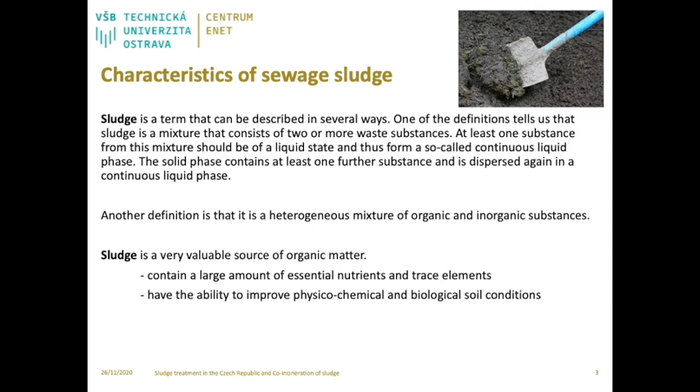Raw sludge has a water content of approximately 93% to 99%. Therefore, dewatering or drying can be necessary for further utilization. The second main component is dry substance, which is made up of organic and inorganic substances.

Organic substances can be divided into two groups: non-toxic and toxic substances. Non-toxics are represented by up to 60%, and include mainly sugars, fats, proteins, waxes, and also nitrogen and phosphorus compounds. Sludge also contains potassium, but to a lesser extent than nitrogen and phosphorus.

Toxic substances include hydrocarbons, pesticides, polyphenols, and heavy metals. Not only organic substances are here, but also inorganic substances, which include quartz, feldspar, carbonates, or iron oxides.

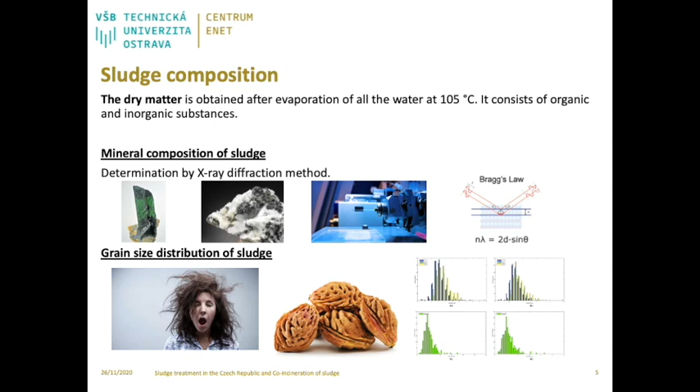As was mentioned before, sludge can contain also heavy metals. Increased concentration of toxic substances is mainly caused by elements for which the set limit values are monitored and evaluated. These values must be observed in cases where the sludge will continue to be used for applications on agricultural land. In situations such as this, it is therefore necessary to make a thorough analysis of the soil and set limits on toxic elements which are dealt with in the decree of the Ministry of Environment.

Monitoring and analysis are carried out mainly at those treatment plants for which the intention is to use the resulting sludge on agricultural land. The number of currently monitored wastewater treatment plants is around 100 facilities. Toxicity is monitored for elements such as arsenic, cadmium, lead, copper, and mercury, and also others.

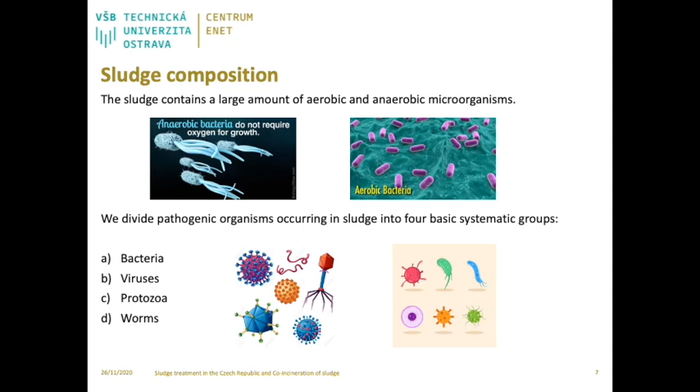Especially for certain species of parasites, we divide pathogenic organisms occurring in sludge into four basic systematic groups. The first are bacteria, then viruses, then protozoa, and worms.

Selection sludge examination details the main analytical protocols for the following properties: dry matter content at 105 degrees Celsius, then suspended solids at 105 degrees Celsius, then fire losses, there are more options, 105 to 180 degrees, then 105 to 250 degrees, then 105 to 550 degrees, and the final 550 to 900 degrees.

Other properties are weighted elementary composition, especially for organic sludge, then temperature, pH, oxidation reduction potential, conductivity, alkalinity, fats, fiber content, pathogenic agents, salinity, chlorides, amounts of water bound with suspended solids, and quality of sludge interstitial water.

Sludge structure can be identified by the following factors. Apparent viscosity in relation to rheological behavior. Slimy suspensions are non-Newtonian liquids. The figure found will depend on the type of rheometer used and on the strain shear energy applied. Therefore, when stating a sludge viscosity, the type of rheometer used and strain applied must also be specified.

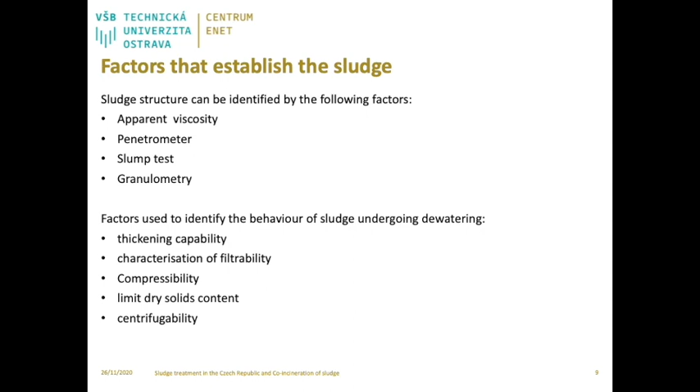We recognize 5 types of formation and division of sludge.

Another one is secondary sludge. It separates in the settling tank, where the biological stage of purification takes place. The structure of the sludge is flaky, which negatively affects its dehydration, which is more difficult than in the primary sludge. The color of the sludge ranges from light gray to dark brown. Composition also depends not only on the nature of the wastewater, as with primary sludge, but also on the technologies used during treatment. Impurities that haven't been completely removed during the treatment of the primary sludge, like gravel fibers, may still be present in the secondary sludge. It's more often called active sludge.

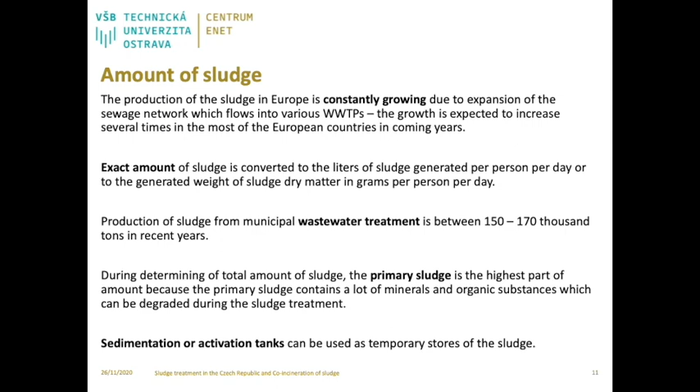For evaluating sludge treatment systems, it's necessary to estimate the amount of generating sludge. Part of the primary sludge can be easily determined by successful elimination of solids. The highest efficiency system is if the elimination of solids is around 50 to 70%.

Sludge treatment systems can be divided into three groups based on concentration of sludge: problematic system, sludge with concentration of 3%; average system, sludge with concentration of 4.5%; and optimal system, sludge with the highest concentration, about 6%.

The estimate of the amount of chemical sludge depends on stoichiometry and amount of chemicals. The amount of biological sludge is more difficult to estimate; a number of methods and procedures must be followed.

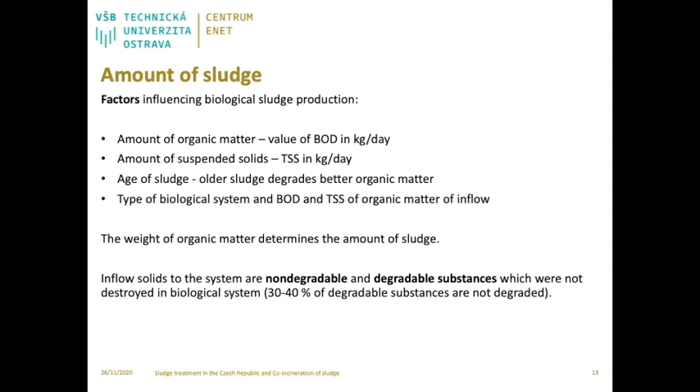At least half of the total was used as a fertilizer for agricultural use in two European Union member states, Ireland and Lithuania, as well as in Norway. By contrast, 84% of sewage sludge was composted in Estonia, and 53% in Luxembourg.

Alternative forms of sewage disposal may be used to reduce or eliminate the spread of pollutants on agricultural or gardening land. These include incineration and landfill. As there are more environmental concerns about the latter, incineration is increasingly the method of choice.

The Netherlands reported 98%, Germany 64%, Belgium 79%, and Austria 53% incineration as their principal form of treatment for disposal.

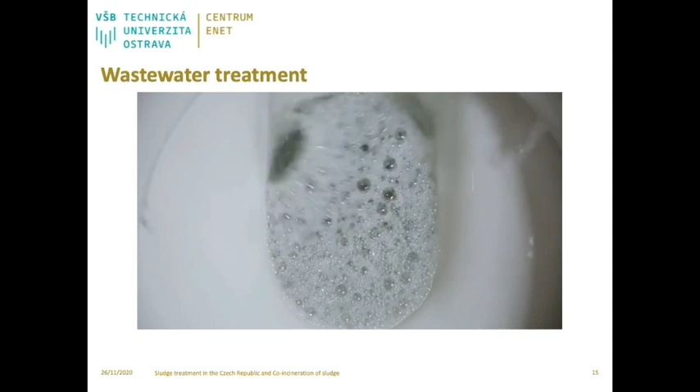It's a topic we'd rather not think about. Where does last night's dinner go when we flush it down the drain? While you may already be grossed out just thinking about it, this question leads to a significant subset of civil engineering and a massive amount of public funding.

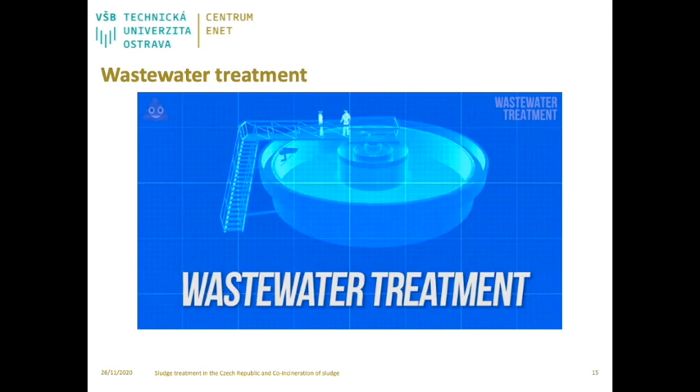Just like all dogs go to heaven, all drains in a city lead to a wastewater treatment plant, where that wastewater gets turned back into water we can drink. You may be thinking you'd rather let bygones be bygones and not think about this nasty part of real life, but chances are you've drunk water that was waste at some point, so you might want to take some time to understand this engineering process that makes dirty water clean.

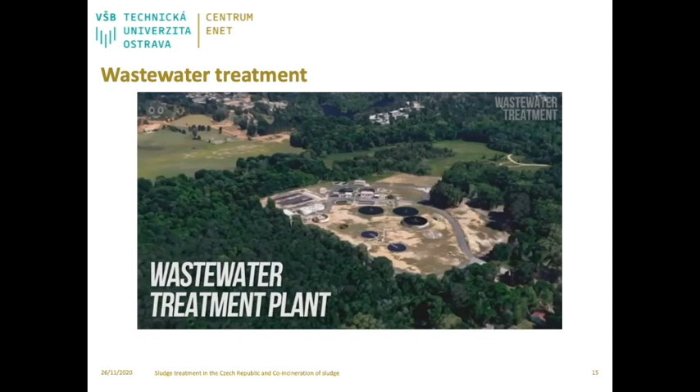Here's where it starts: the toilet. Once you're done doing your business and flush that magical handle, your waste ends up at the inlet of one pretty interesting place, a wastewater treatment plant. Why is this place so interesting? Because it takes arguably one of the most disgusting substances in the world and turns it back into something essential to all life.

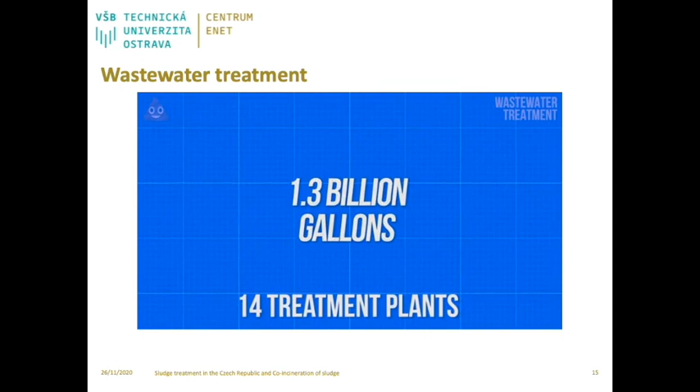Flushing just your toilet at halftime may not seem like a big deal, but when you couple it with thousands, if not millions, of others doing the same, it can result in some pretty high sewage flow rates. New York City has an array of 14 wastewater treatment plants that handle a combined 1.3 billion gallons of wastewater daily. That's enough wastewater to fill the Dead Sea with pure sewage in just 8 years. And that's just New York City.

There are an estimated 14,748 treatment plants in the US alone that 76% of the USA's population relies on, according to the American Society of Civil Engineers. Understanding wastewater is crucial to understanding the critical infrastructure needed to support modern life.

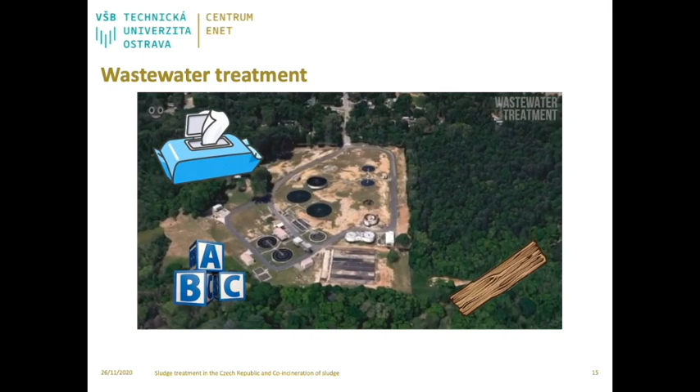That brings us to the first step of the process, which handles larger items in sewage, things like flushable wipes, 2x4s, toys, or even guns. You name it, and it's probably been caught in a bar screen. Bar screens are exactly what you'd think: large vertical bars that stand at the inlet of nearly every wastewater treatment plant, designed to stop larger items from getting to the plant and hurting machinery like pumps.

This first process, where bar screens are used, is commonly referred to as pre-treatment. The sole intention of pre-treatment is to remove the outliers in the sewage and make the whole mixture a little more homogeneous, or slightly less chunky. Bar screens are typically mechanically raked at certain intervals, depending on the flow rates of the water treatment plant, although some older plants still have more manual removal processes.

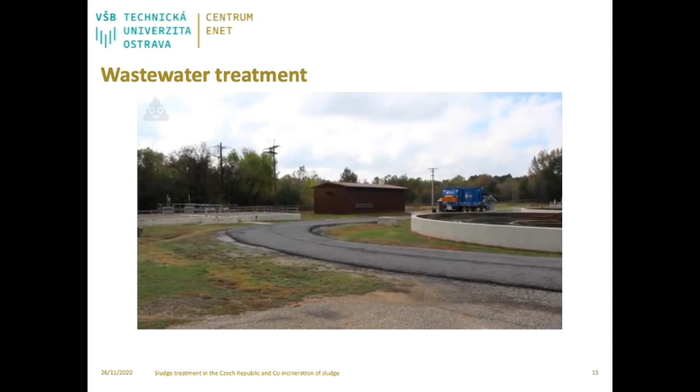Whatever is removed from the bar screens is then sent off to your average landfill or solid waste handling facility. Or, in the case of unusual items such as guns, they're sent off to the evidence locker at a police station to be investigated. Next up is the grit chamber.

Grit chambers are the next step in the pretreatment process following bar screens. Since these bars don't catch everything, smaller particles called grit still need to be removed from the sewage as it's made even more homogeneous. As the sewage flows into the grit chamber, the velocity of the rather viscous sewage is adjusted to allow particles of sand and rock to settle out.

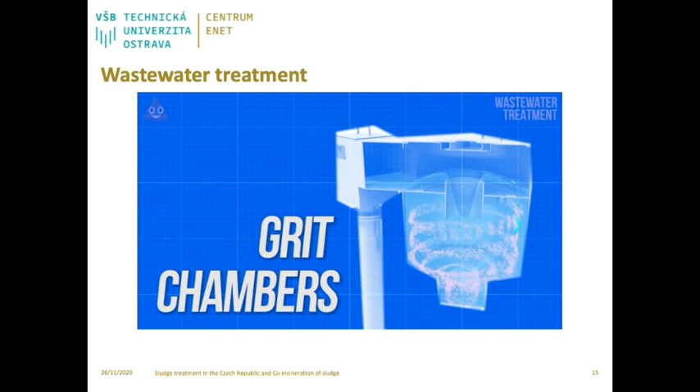This is needed because these particles can't be removed using chemicals, and they could potentially clog or destroy pumps later on in the process. There are three types of these chambers: horizontal grit chambers, aerated grit chambers, and vortex grit chambers, which all accomplish the same task using slightly different methods.

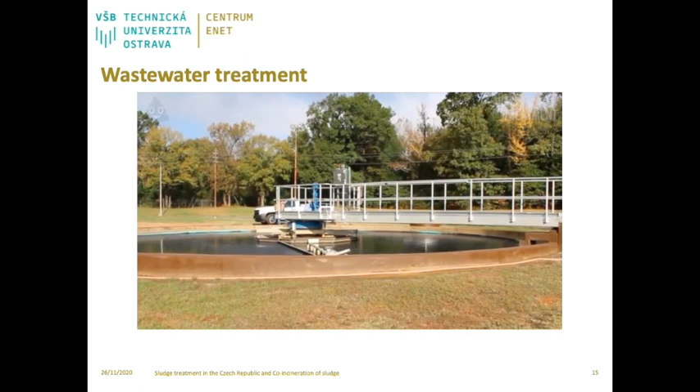Following the grit chambers, the sewage moves on to the primary treatment process, which starts with a large basin called a primary clarifier. Primary clarifiers, and clarifiers in general, function on the principle of settling velocity. This term can be defined simply as the speed at which a particle settles.

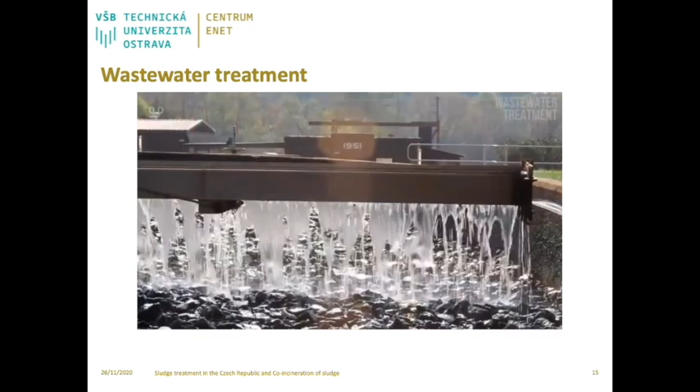For wastewater being pumped into clarifiers, it's important that the flow rate of the water doesn't exceed the settling velocity of the particles trying to be removed. To accomplish this, engineers vary the size and number of primary clarifiers according to the plant's permitted sewage flow rate, ensuring solids can settle out correctly at varying flow levels. At this step, the slightly treated wastewater, called effluent, is free of solids larger than 10 micrometers and should be mostly organic matter, which will be treated further.

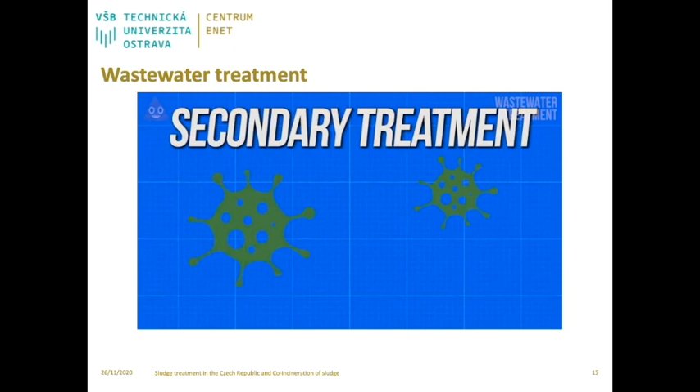The top layer of the clarified water flows over a weir wall into the next basin, called the aeration basin. Now begins secondary treatment, the sole focus of which is to significantly degrade the biological content of the sewage. In many cases, this process starts with aeration basins. Effluent flows into the aeration basins, at the bottom of which are hundreds, if not thousands, of tiny air blowers that create bubbles through the water.

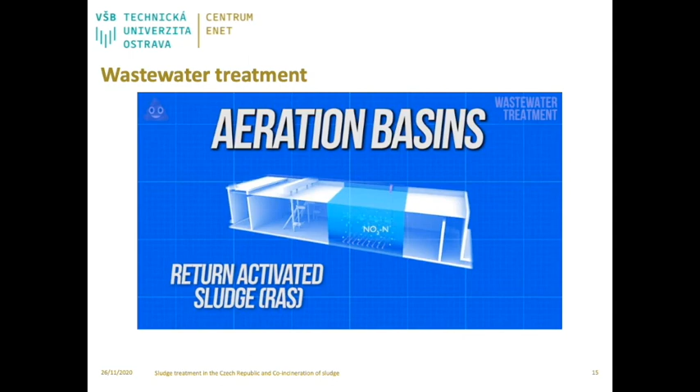The water is pumped into this tank along with return-activated sludge. You can think of return-activated sludge as a bunch of happy little bacteria that get to eat their favorite foods all day long. This introduction of significant bacteria along with massive amounts of oxygen from the bubblers creates an environment perfect for aerobic digestion, which is simply the breakdown of organic matter using excess oxygen.

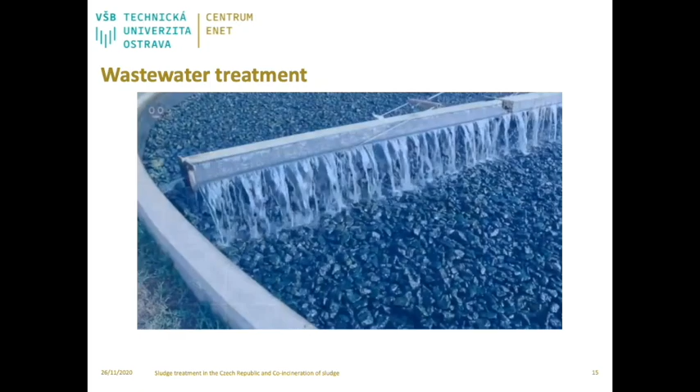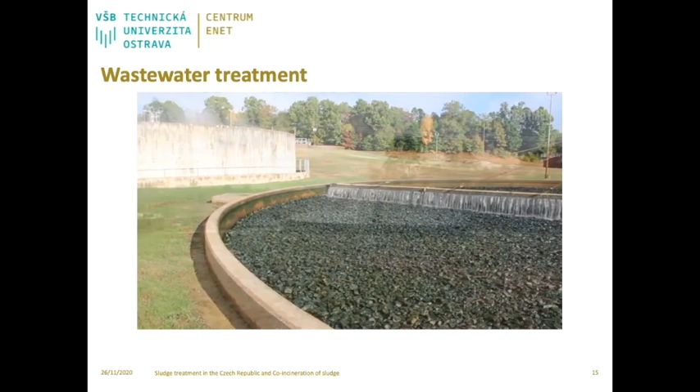Some older plants add another step before aeration basins called biofilters or trickling filters. Found in many older plants, these filters trickle the effluent over a medium like stone or plastic, allowing a film of bacteria to consume any organic matter in the water. This step is largely unused in newer plants due to more efficient modern processes, but plants with basins already installed still use them since they only benefit the treatment process in most cases.

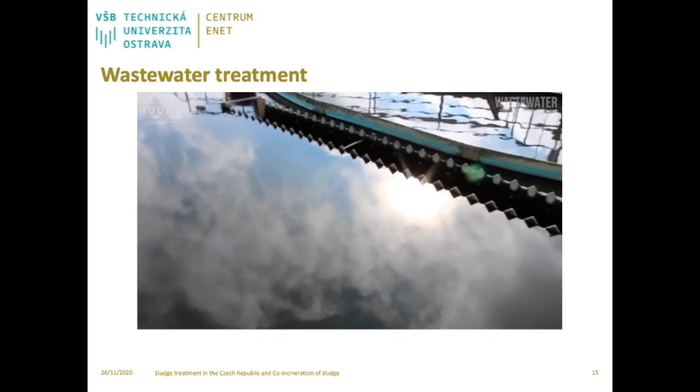Following aeration basins, the effluent along with much of the sludge is pumped into a secondary filter or clarifier, where some of the sludge is removed and pumped back into the aeration basins as return-activated sludge. Further settling of larger particles is also accomplished here, as it's the final step that removes solids and larger biological matter. Water flows out of secondary clarifiers over a weir wall nearly identical to the primary clarifiers and moves on to the disinfection process.

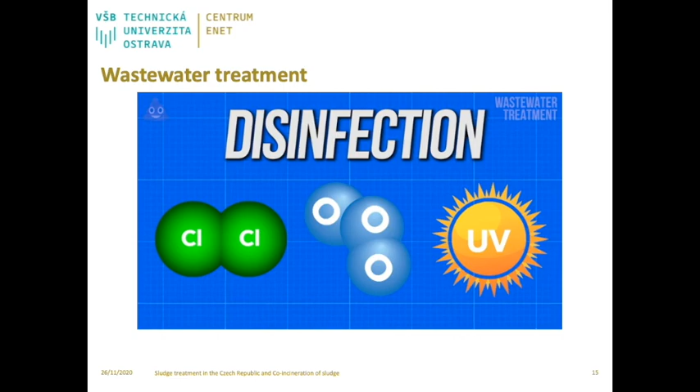At this point, 85% of all organic matter is removed from the water, and the effluent should be safe to drink in most cases, although you probably wouldn't want to. Disinfection is the final step and is usually accomplished in one of three ways: chlorine, ozone, or ultraviolet disinfection. Each process has benefits and drawbacks, with each being used commonly throughout wastewater treatment across the world. Chlorine disinfects the water through chemical disinfection.

Chlorine, which you can think of as concentrated bleach, is added to the effluent to kill off any remaining bacteria and organisms still living in the water. When chlorine is added to kill off the bacteria, it then has to be removed before it can be discharged, so as not to kill off anything at the discharge location. After this, the water is safe enough to discharge into a stream or lake.

Ozone disinfection is another method that involves pumping an electrical current through the water, causing oxygen molecules, O2, to disassociate and combine with a free oxygen molecule, forming O3, known as ozone. Ozone is an incredibly strong oxidant and causes microbes' cell walls to leak, rapid cell decomposition, and overall damage to cells. In other words, it kills off bacteria.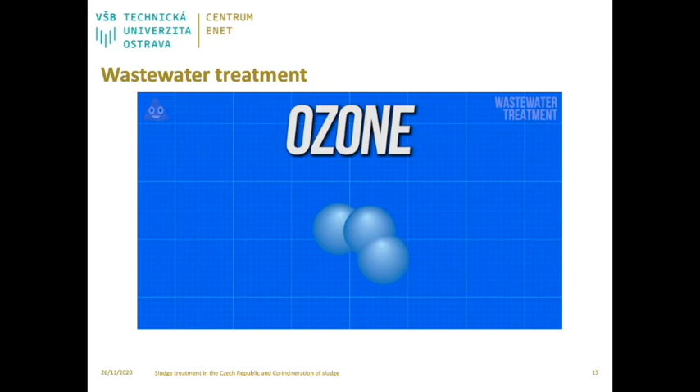The last common method uses ultraviolet light to scramble bacteria's DNA so they cannot multiply. In UV disinfection, bacteria in the water aren't killed, rather they're sterilized, rendering them harmless. If you were to ingest water with living microbes immediately following UV treatment, any harmful bacteria would be unable to multiply or cause damage to your body.

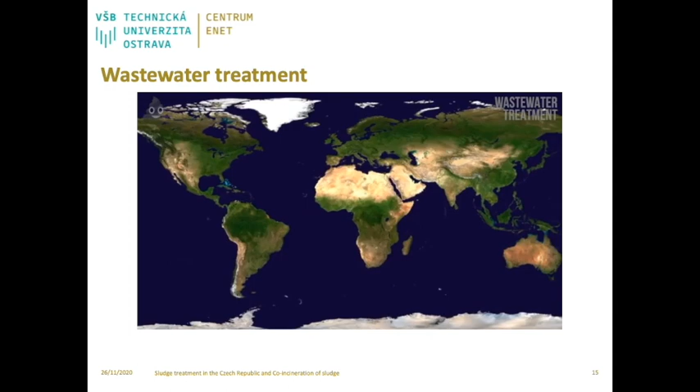Engineers choose between these disinfection methods based on factors such as flow rates, cost, and location of discharge, which brings us to the final step: effluent release. Effluent release exists in one of two forms. In most cases, the now treated water is released back into a stream, lake, or other water source. In rare cases, usually in areas where water is scarce, effluent discharge from a wastewater treatment plant can be sent directly into another treatment plant, where it will be treated further for consumption.

This is referred to as full-cycle water reuse. From a chemical perspective, the final drinking water is the same as normal treated water that flows through your pipes now, but due to the connotation of your drinking water being sewage just days before, this treatment process is normally shied away from or not heavily publicized.

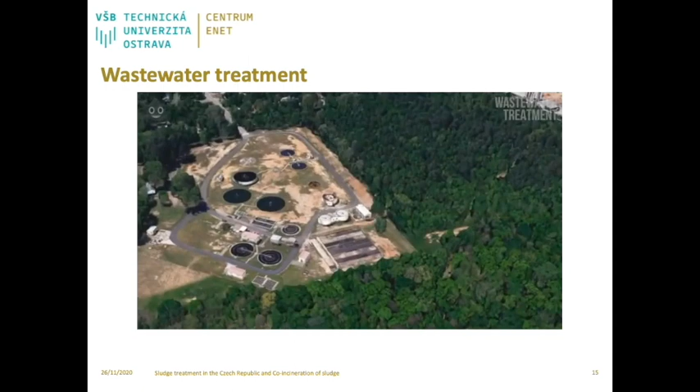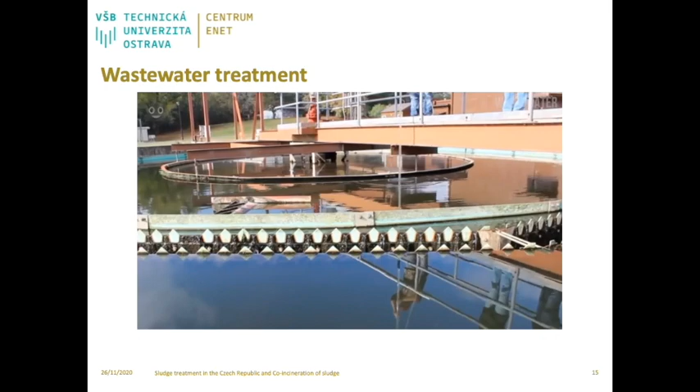The entire process of wastewater treatment takes on average 24 to 36 hours from when a drop of water enters to when it leaves. Each wastewater plant will receive a permit for flow rates, chemical levels, and effluent quality, among other things, from the EPA that outlines the necessary treatment for a plant. Wastewater plant operators will make adjustments to a plant's operation and constantly measure levels to ensure proper discharge and proper treatment. Without these operators and the dirty job that they do around the clock, our sewage would always stay sewage and sanitation in modern cities would be much, much worse.

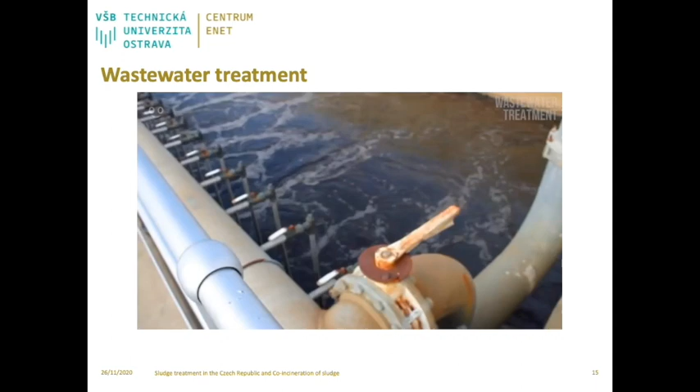Wastewater treatment is an essential dirty job, and you can thank the 14,748 treatment plants in the US alone for not having to worry about what happens when you flush.

What is wastewater? Wastewater is water from households, municipalities, and cities, atmospheric water in which physical or chemical changes have affected its quality. Wastewaters are drained through a sewer network.

The first one is sewage wastewater. It contains a high amount of organic substances, and up to 80% is fecal contamination. Therefore, sewage wastewater is full of bacteria. The highest numbers are in the warm summer; with decreasing temperature, their amount is significantly lower. From the inorganic substances, chlorides, phosphorus, and nitrogen are the most represented. The undissolved substances in sewage are approximately 200 to 400 milligrams per liter, where about 73% are settleable and 27% non-settleable. The pH value is in the range of 6.5 to 8.5, which means the water is neutral to slightly alkaline.

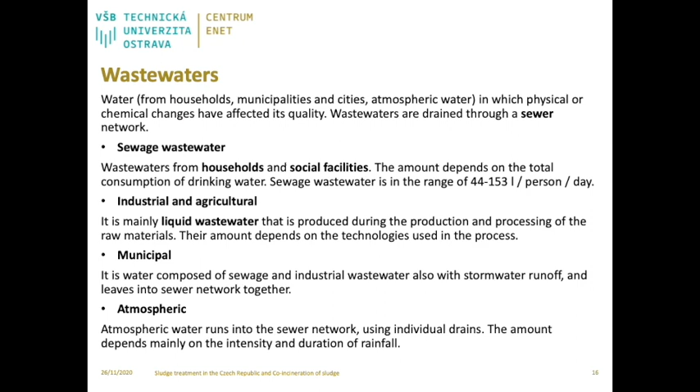The Ministry of Agriculture coordinates the implementation of controls over compliance with obligations related to the use of treated sludge on agricultural land. The Central Institute for Supervising and Testing in Agriculture checks compliance with the obligations when using treated sludge on agricultural land. It imposes penalties for the breach of obligations pursuant to Act number 156/1998, on Fertilizers, soil conditioners, auxiliary plant preparations, and substrates, and on agrochemical testing of agricultural soils, the Fertilizers Act.

Support technologies for the recovery of sludge from municipal wastewater treatment plants are used for monitoring and evaluating the quantity of sludge from municipal wastewater treatment plants and the quantity of sludge utilized for application to the soil. On the basis of legislatively established microbiological and chemical parameters, they vigorously check the quality of treated sludge for application to soil.

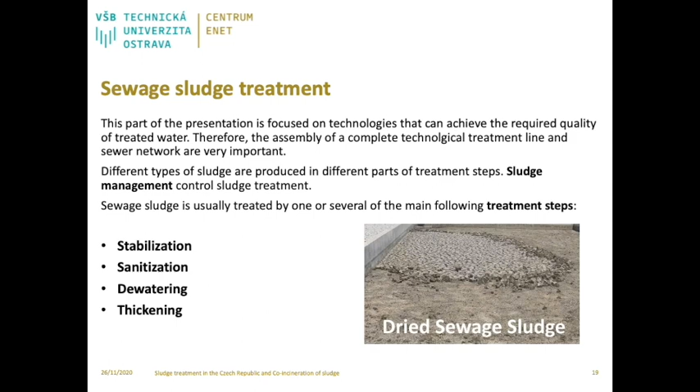The first one, sludge stabilization. Sludges are stabilized in order to reduce organic matter, odor production, and to eliminate pathogenic organisms. Stabilization of sludge can be done chemically or biologically: aerobic stabilization, anaerobic stabilization, or chemical stabilization.

Aerobic stabilization: during aerobic stabilization, biodegradable substances are oxidized. The purpose is to prolong the age of the sludge beyond 20 to 30 days, or to aerate the excess activated sludge in the stabilization tank. The content of organic substances in dry matter is in the range of 40 to 60%, and the amount of living microorganisms is below 10%.

Methanization tanks mostly have an ovoid shape with a conical neck. Inside this tank there are a mixing unit and a thermal insulation unit. Heating is performed with hot water, steam, or heaters. The biogas produced is collected in a floating gas bell, and stabilized sludge is pumped out several times per year.

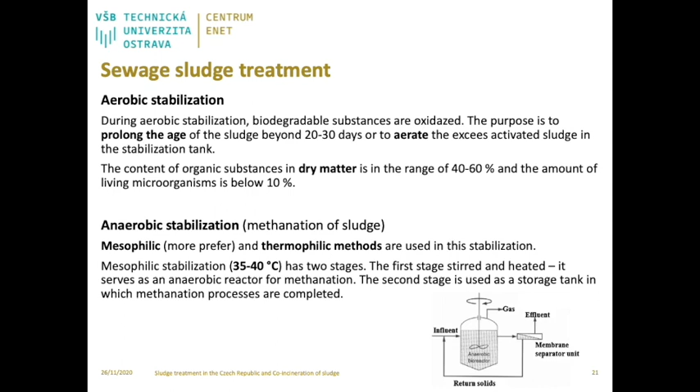Chemical stabilization is based on a reaction with calcium oxide, which reacts with water to form calcium hydroxide and heat. Quicklime is supplied in an exact amount to reach a pH higher than 12 for at least 2 hours. After 14 days of treatment, the pH value must be more than 11. Most microorganisms become inactive after increasing pH value and thus cannot participate in decomposition of sludge.

Advantages and disadvantages of this method: it is simple and has an excellent hygienic effect, but the disadvantage is that dry matter of sludge increases, and also ammonia is released into the air. In sludge after sanitization, the numbers of pathogenic microorganisms have been minimized to the exact required value. For sludge, sanitization uses a process with lime or heat.

What about sludge thickening? The primary purpose of sludge thickening is to concentrate solids, reducing the volume of sludge. It reduces operating costs and hydraulic load of sludge management, and simplifies final processing and storage. Sludge thickening is provided by gravity and mechanical processes to remove water from the sludge. After thickening, optimal content of dry matter is around 6%. The most commonly used thickening processes include gravity thickening, flotation, centrifuges, and sludge dewatering belts.

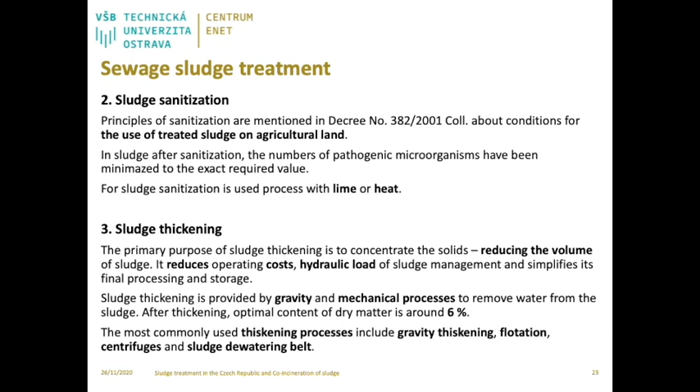Sludge dewatering: the purpose of dewatering is to reduce the volume of sludge to prepare it for effective disposal and incineration. Sludge dewatering uses centrifuges and belt press dewatering, or dewatering in sludge fields and lagoons. In contrast to sludge fields, sludge lagoons have a natural bottom without drainage. Disadvantages of these two methods are space consumption and climate changes.

There are two types of dehydration: direct and indirect drying of sludge. During indirect drying, heat is transferred to the dried material by thermal surfaces; sludge doesn't come into direct contact with steam or hot oil. The final products are granulate or briquettes. In direct drying, heat is supplied directly to the material by hot gas. The most commonly used dryers are rotary drum dryers, fluidized bed dryers, and belt dryers.

In the European Union, wastewater treatment plants produce up to 30 kg of dry sludge per capita per year. The estimated annual sludge production in Europe in 2020 is 13 million metric tons of dry matter.

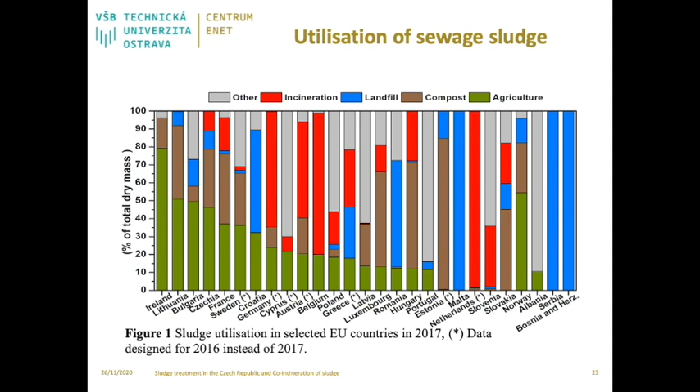Sludge used in agriculture can easily create a diffuse source of environmental contamination. However, some European Union countries have reduced the use of sludge on agricultural land to avoid risks associated with contaminants of emerging concern and pathogens. Large wastewater treatment plants in Germany will not be allowed to use sludge as a fertilizer or as a component in compost.

A key factor in the revised regulation is the introduction of a future obligation to recover phosphorus in all treatment plants that have a total phosphorus content of more than 20 grams per kilogram in the sludge dry matter. There is currently a 12 to 15 year transition period. From January 1st, 2032, there will be a ban on the application of sludge on agricultural land for wastewater treatment plants with 50,000 to 100,000 population equivalent, and for wastewater treatment plants higher than 100,000 population equivalent. In the future, it's expected that the need to recover phosphorus will also be introduced for treatment plants with a smaller population, less than 50,000 population equivalent.

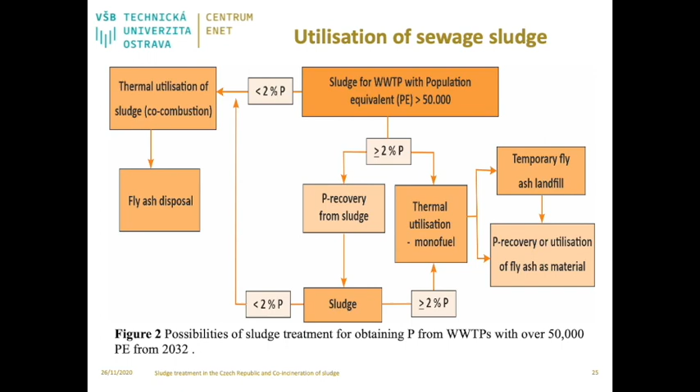Wastewater is also used for irrigation and fertilization. Irrigating short rotation coppice plantations with wastewater solves farmers' water shortage problems and can also reduce fertilization costs for them. Research in this area is underway, for example in Greece, where the possibility of fertilizing with sludge and wastewater was investigated for hemp hibiscus, which is grown to obtain fibers. The cultivated plants showed the same properties as the plants grown with conventional fertilizers.

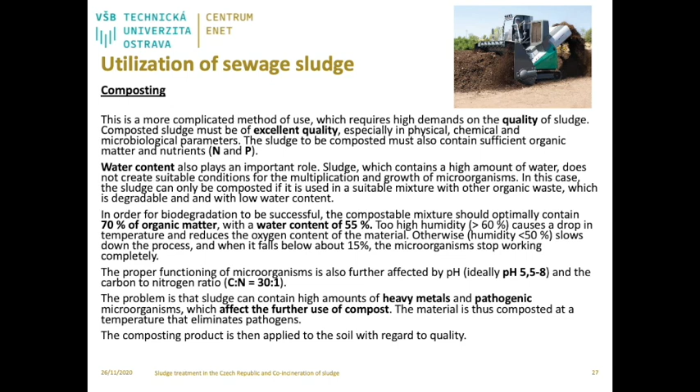When sludge meets the established stabilization criteria, it can be used for recultivation, depending on the sewage sludge treatment technology and consistency of the treated sewage sludge. It's an effective method for how to utilize sludge from big wastewater treatment plants and to produce biologically active reclamation material, a mixture of waste soil, fly ash from the combustion of fossil fuels, and stabilized sludge from wastewater treatment plants. This method is suitable for the reclamation of landfills, waste dumps, and also excavated mining areas that will not be used for agricultural production.

Monthly consumption of toilet paper in the Netherlands is 1 kilogram per month. The length of the fiber in toilet paper is a standard parameter in the range of 1 to 1.2 millimeters. The size of the fibers affects their occurrence in wastewater in the grain size class above 0.35 millimeters. This information was used to implement the Cellvation process, which can be used instead of or in conjunction with the primary treatment of a sewage treatment plant. Up to 40% of total suspended solids are captured when the wastewater passes through the bar screen. Industrial filtration is followed by purification and sterilization at very high temperatures. The resulting product is high-quality recycled cellulose fibers, which are widely used in various industries: construction, paper and board production, or used for the production of polymer granules.

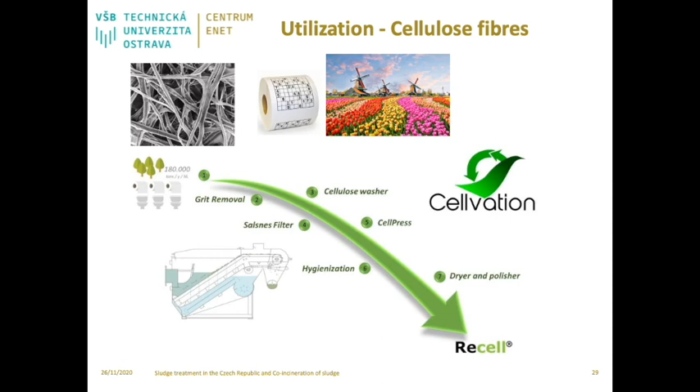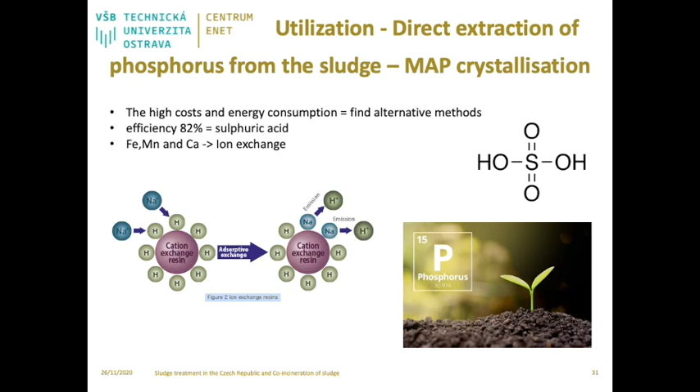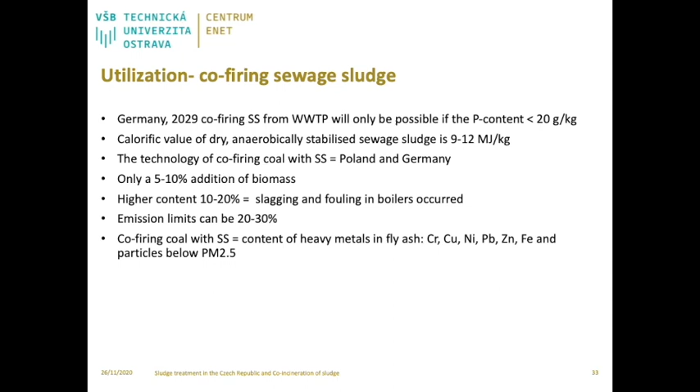Emission limits for stationary emission sources can be met even with the addition of 20 to 30%. Studies of co-firing coal with sewage sludge show that the addition of biomass affects both the content of heavy metals in fly ash—chromium, copper, nickel, lead, zinc, and iron—and the amount of fine particulate matter, especially particles below 2.5 micrometers in emissions.

Today, a relatively high percentage of sludge is disposed of in a thermal manner. Special combustion equipment is used for the process; the sludge can be incinerated in incinerators or cement kilns. It's necessary to pre-dry the sludge to remove excess water so that the sludge is not sticky. The end product is ash, in which most heavy metals remain.

As sludge is a renewable energy source, combustion is therefore an excellent way to produce electricity, which can be expected in the years to come. There are 170 sludge incinerators in operation in the USA, which use incineration technologies such as multiple hearth, fluidized bed, and electric infrared.

Some sludge is co-fired with municipal solid waste in combustors with suitable technology for refuse combustion. There are currently 27 mono-incineration facilities for sewage sludge in operation in Germany.

Mono-incineration facilities burn sewage sludge at an operating temperature of 850 to 950 degrees Celsius. At temperatures below 850 degrees Celsius, the occurrence of odorous substances is a problem, and at temperatures above 950 degrees Celsius, sintering can occur.

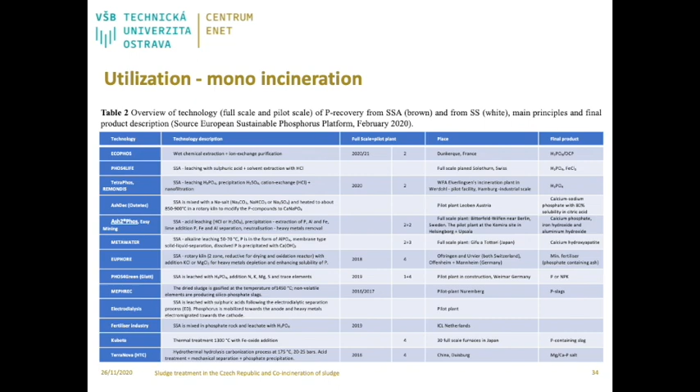50 to 60% of the ash consists of acid-insoluble silicate sand, which can be used as a component to replace cement in production. The gasification of biomass, raw organic feedstock available in several typologies in nature, represents a process through which it's possible to produce energy.

This process allows a remarkable reduction of greenhouse gases and atmospheric pollution, while also reducing the costs related to the management and disposal of biomass that is continuously produced, such as sewage sludge—the residual semi-solid material produced as a byproduct during sewage treatment of industrial or municipal wastewater.

An alternative and innovative approach to traditional land spreading is to use dried sludge as fuel for thermochemical processes such as gasification, which can greatly reduce the volume of the separated waste product inside the main treatment plant. SingaSmart technology is designed to process not only woody biomass but also other organic residues, including sewage sludge.

Through a proper pretreatment process, including drying and briquetting, sewage sludge can be introduced into a SingaSmart gasification unit to convert the organic compounds into a useful flammable gas, with a variable heating value depending on feedstock parameters such as inert content, ashes, carbon content, and lower heating value. This approach offers the double benefit of both volume reduction and energy generation.

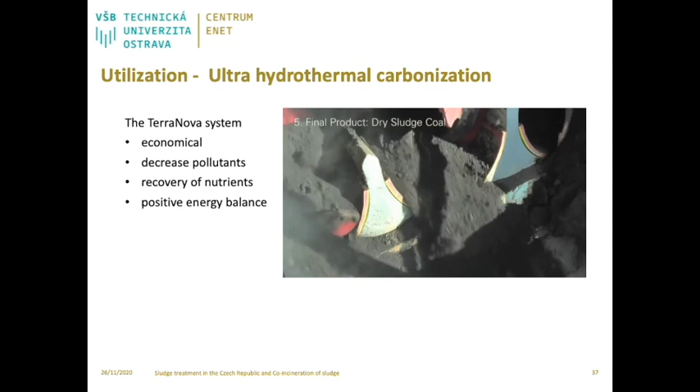As part of an initiative to protect the environment, Suez prefers sludge destruction solutions with limited impacts and that create value. The destruction of sludge from residual waters can produce steam or electricity.

The sludge destruction processes deployed by Suez can destroy sludge, evaporate water, burn organic matter, and limit the impact on the environment. They reduce polluting emissions and olfactory nuisances. Finally, they are energy efficient, producing steam or electricity.

Every day, cities and towns need to treat wastewater and its sludge, which is an energy-intensive process. At Anglian Water's Great Billing Wastewater Centre in the UK, they don't just treat the wastewater sludge, they convert it into valuable products using Suez's Monsal Advanced Anaerobic Digestion and a combined heat and power gas engine. Here's how it works.

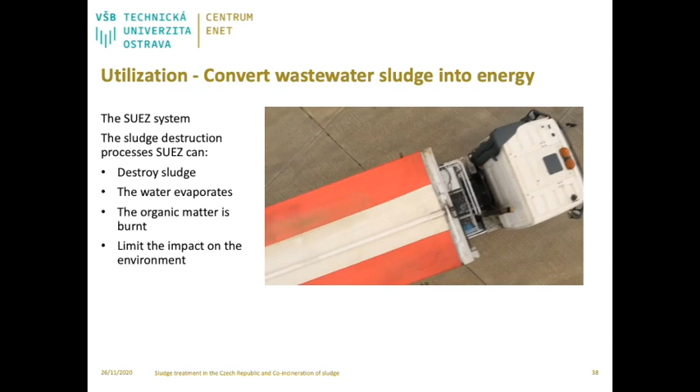Anglian Water's Great Billing facility brings in sludge cake from other nearby wastewater plants via truck. After unloading the truck into the raw sludge system, the imported raw, untreated sludge cake is blended with the sludge indigenous to the Great Billing site. The combined sludge is blended prior to being transferred to the digestion plant to provide a consistent material for the advanced digestion process. The biological hydrolysis process is the key enabler of advanced anaerobic digestion.

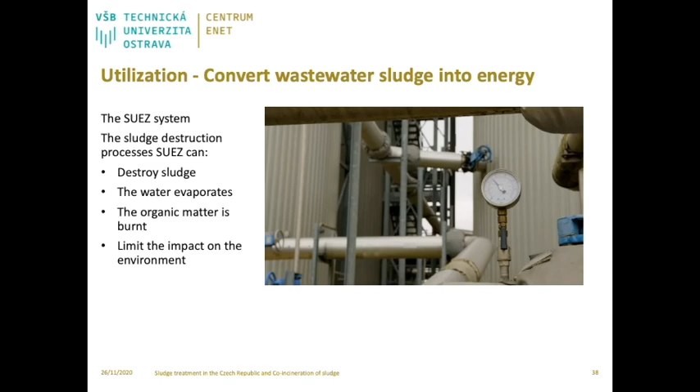It pre-treats the sludge to allow the existing digesters to treat more sludge and increase the volatile solids conversion rate. The biological hydrolysis process optimizes the sludge temperature. Initial heating brings the sludge temperature to 42 degrees Celsius, or 108 degrees Fahrenheit. In the final stages of the process, the temperature is raised to 55 degrees Celsius, or 131 degrees Fahrenheit, which neutralizes pathogens and enables the broader system to produce an enhanced biosolids product.

From the biological hydrolysis plant, the hydrolyzed sludge is transferred to the digesters. In the absence of oxygen, the digesters' bacteria break down the sludge to create biogas at an optimal rate. Because of Suez's patented biological hydrolysis process, digester performance is dramatically improved, achieving higher gas retention with shorter digester retention time compared to conventional mesophilic digestion. This allows significantly more sludge to be treated in the existing infrastructure.

At Great Billing, the amount of sludge treated through existing digesters was increased by 3 times using Suez's process, which allowed the plant to become Anglian Water's main regional sludge treatment center.

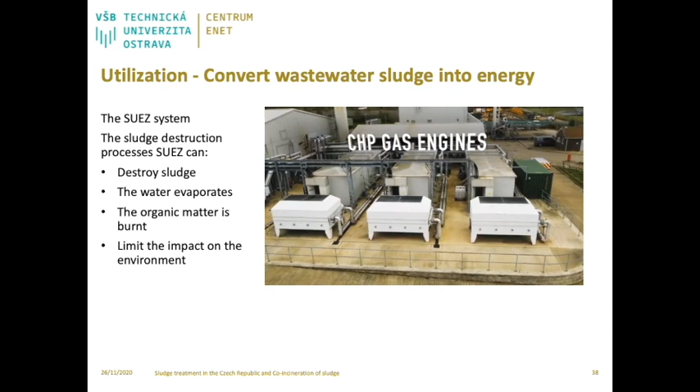Methane-rich biogas is drawn from the digesters and converted into renewable electricity and heat using CHP gas engines. At Great Billing, sufficient renewable electricity is generated to meet the demand of the entire wastewater treatment plant, with surplus electricity exported to the national grid. Heat recovered from the CHP unit's cooling systems and exhaust gases provides virtually all the heat needed to support Suez's advanced anaerobic digestion process.

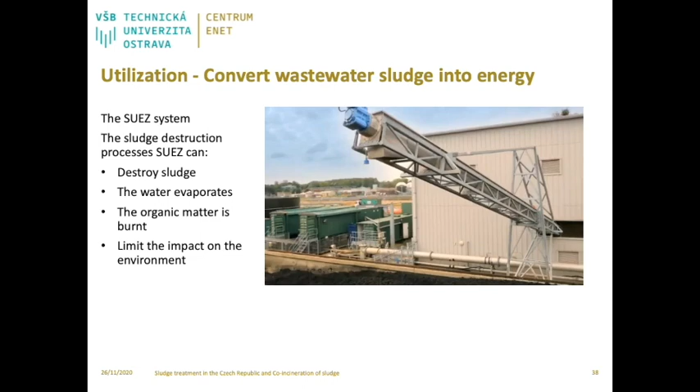Following digestion, the digestate is sent for dewatering to produce cake used for land application as a nutrient-rich fertilizer. Suez's advanced anaerobic digestion technology can be applied to both existing and new-build wastewater treatment plants. Suez's process guarantees digester performance, which allows water utilities to harness the energy present in wastewater sludge and transform from energy users to energy producers.

Mitsubishi's newly developed sludge incineration system with zero energy consumption enables power generation that exceeds the inner plant power consumption and is high efficiency power generation. The combination of heat recovery from high temperature exhaust gas and a high efficiency binary generator achieves power generation exceeding the inner plant power consumption. This significantly reduces greenhouse gas emission. Their original MCOM control system results in a reduction of fuel and electricity requirement because of its optimized control of combustion air and fuel quantity.

I will show you a video where you can see how this Mitsubishi incineration system works.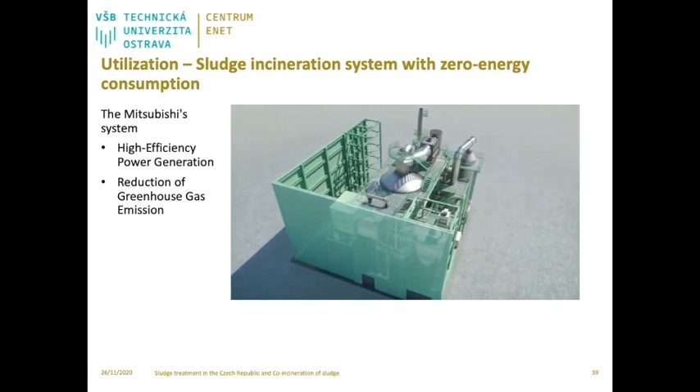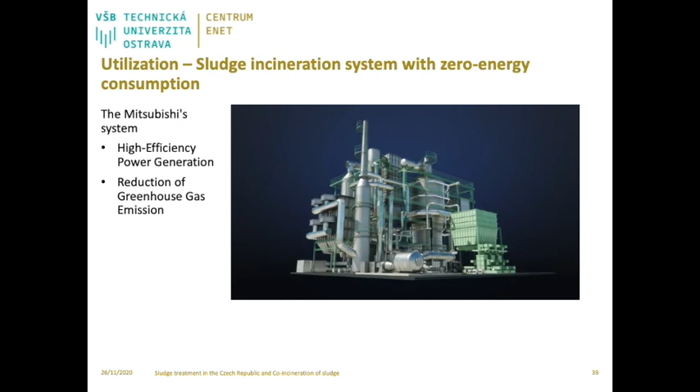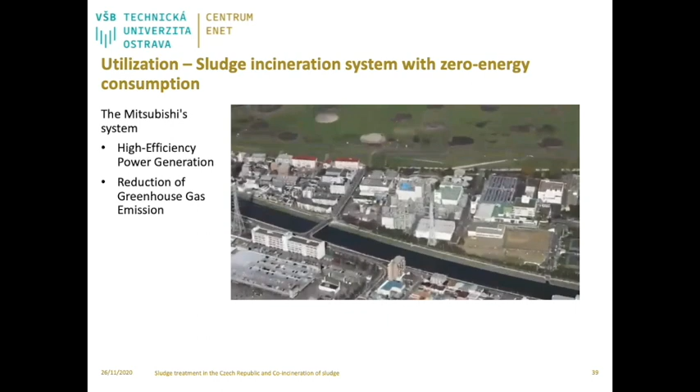We have an extensive track record for designing and building over 30 sludge incinerators. By combining the incinerator with a high-efficient ORC generator, we have created a newly developed sludge incineration system with zero energy consumption using 72% water content undigested sludge, which generates more electricity than inner plant consumption. We received an order for Asia's first commercial sludge incineration plant with no energy consumption using an ORC generator from the Tokyo Metropolitan Government in 2016. We will deliver the plant with a capacity of 250 tons per day in March 2020.

Now we would like to explain our new sludge incineration system with zero energy consumption. The main feature of this system is a highly efficient heat recovery system, composed of the combination of an ORC generator and exhaust heat from the furnace.

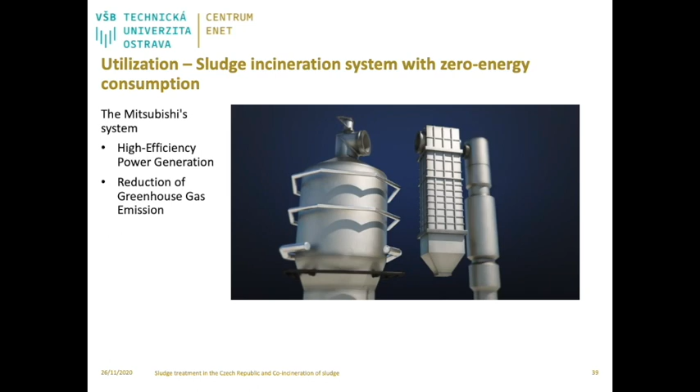The first part is the heat recovery system. This uses a thermal oil heater, which enables us to minimize the size of the plant and recover heat positively. Heat recovery and the amount of power generation can be maximized by arranging the thermal oil heater and air preheater in parallel.

This creates approximately 1,000 kilowatts of power generation, which exceeds the inner plant consumption, and surplus power can be used in other facilities.

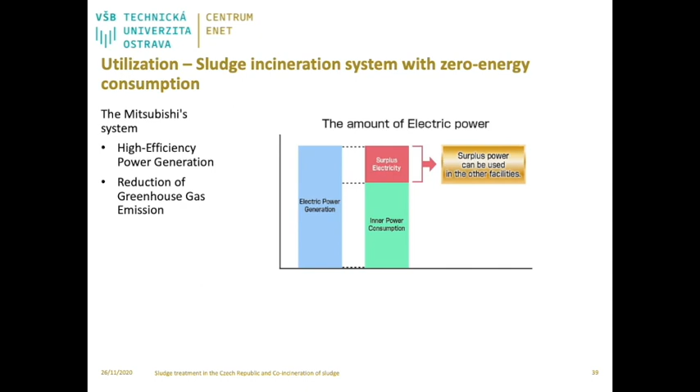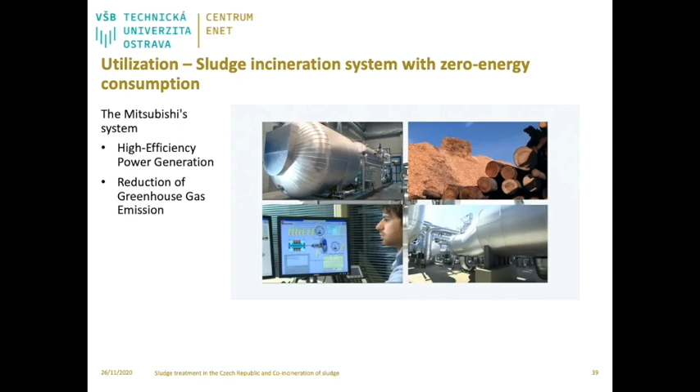The next part is the ORC generator. For this system, the high-efficiency binary generator from Turboden SRL of Italy, part of the Mitsubishi Heavy Industries Group, is utilized. This product has been used in over 300 projects worldwide in the biomass and geothermal power generation fields. This generator can achieve extreme efficiency of 24%, while a steam turbine generator is limited to around 17%. In addition, it has resistance to load variation, which maintains stable power generation.

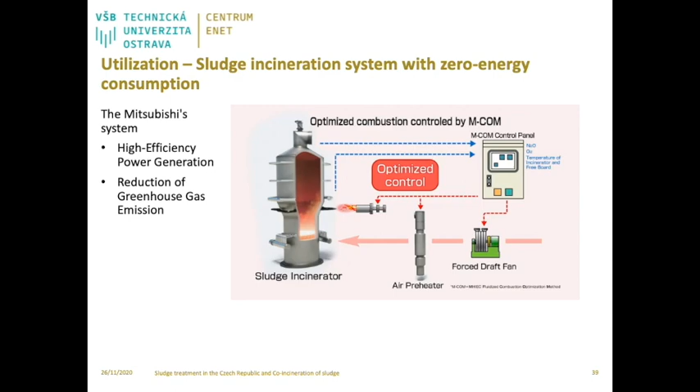Finally, let's take a look at optimum incineration by our original M-COM control. With conventional sludge incinerators, air and fuel are overconsumed as furnace temperature is controlled only by fuel and air temperature. Using optimized control of combustion air and fuel amount, or controlling air temperature by M-COM, results in a reduction of fuel and electricity consumption and dinitrogen monoxide emission.

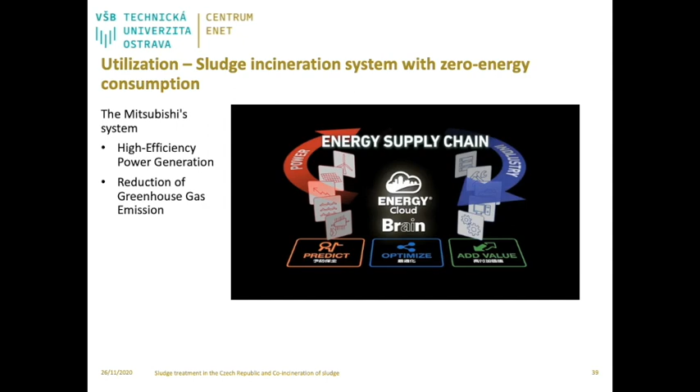We further improve the efficiency of the system to suit the sludge characteristics by introducing remote monitoring and AI control. Our new sludge incineration system results in zero energy consumption while optimizing power generation by heat recovery from high-temperature exhaust gas. Sludge incineration system with zero energy consumption.

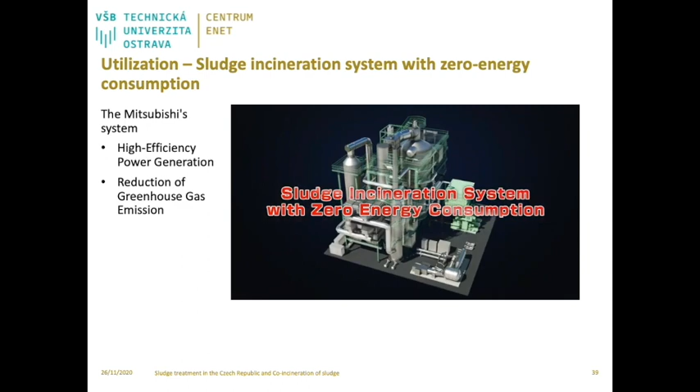A number of researches are currently underway that focus on the use of sludge as a substitute for ceramic clay and clay for brick production. Sludges from wastewater treatment, which are characterized by a high alumina content, are widely used for this purpose. Materials with a sludge content of 5 to 30%, from which bricks are fired at temperatures between 800 to 1000 degrees Celsius, are tested.

Products show high mechanical resistance without deformations and defects. They have high density and flexural strength. These new materials can be used to create terracotta products, refractory ceramics, lightweight aggregate, and glass ceramic products. Sludges can replace brick clay, mainly because they have a very similar chemical composition. Its use in the construction industry is technologically attractive and highly economical and ecological. The ratio of sludge to clay depends on the specific composition and nature of both materials used.